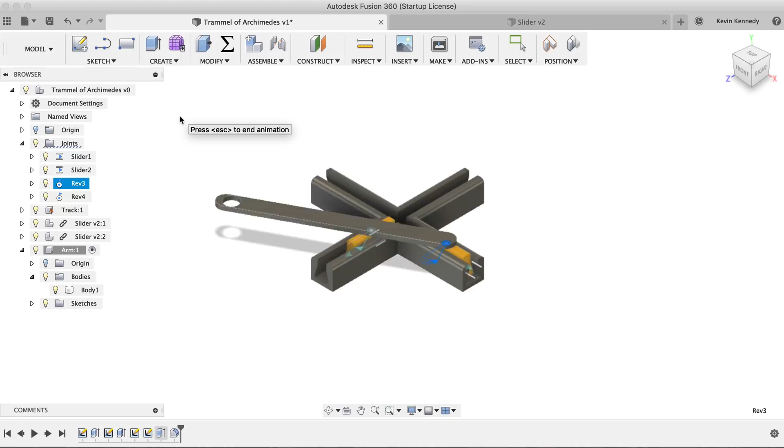By the end of this video, you'll know how to create a Trammel of Archimedes in Fusion 360.

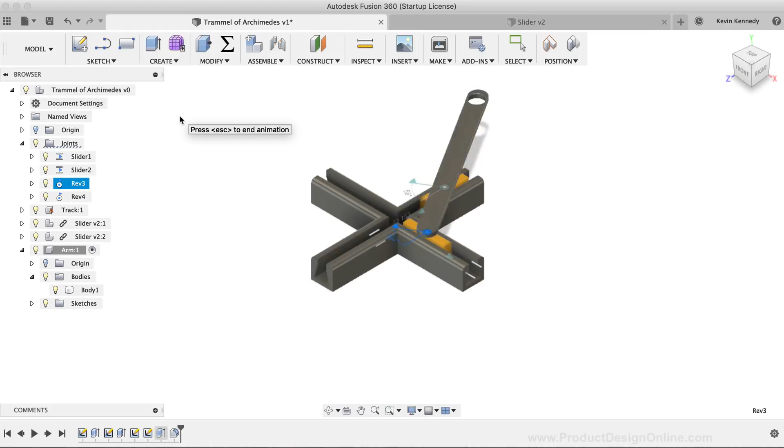The Trammel of Archimedes is a mechanism that generates the shape of an ellipse. Some have even coined the machines to be do-nothing machines, as they're pretty pointless when they have a knob on the end. Usually they have a pencil or knife attached to the end, so one can draw or cut an ellipse into a surface underneath.

These are great little projects for woodworking or 3D printing, and the kids seem to love them, so I thought this would be a fun object to model in Fusion 360.

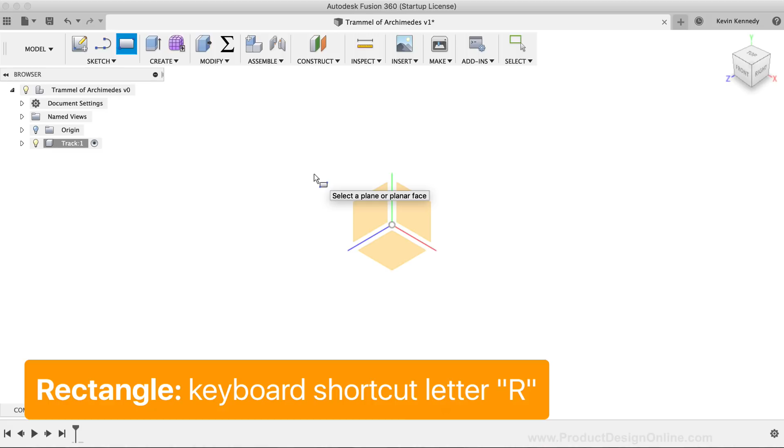With the base component now active, I'm going to activate the rectangle command using the keyboard shortcut letter R as in Romeo. Then you'll be prompted to select the plane to sketch on. I'm going to select the XZ origin plane.

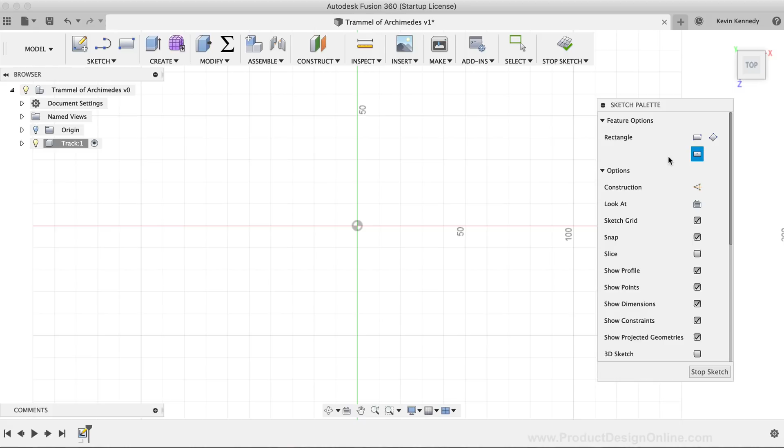Before sketching anything out, I'm going to select the center rectangle option in the sketch palette. I'm simply selecting this option so I can center the rectangle with the center origin point. I'll click on the center origin point and drag out with my mouse.

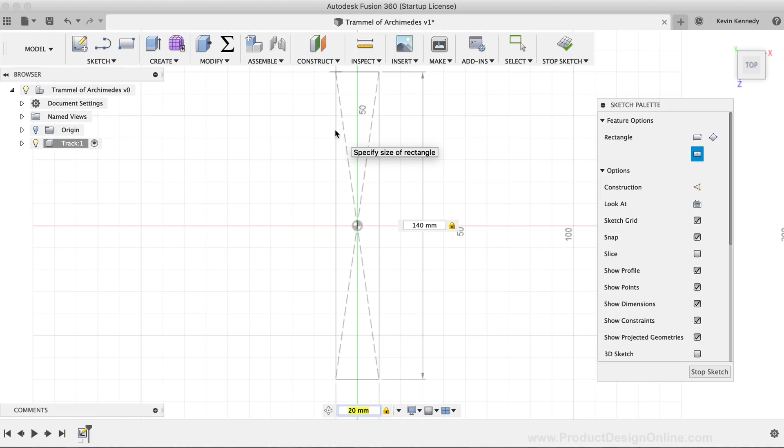I'll type out 20 millimeters for the width, followed by the tab key to lock the dimension in place. Next, I'll type out 140 millimeters for the height, also followed by the tab key to lock the dimension in place. Then I'll simply click to set the rectangle in place.

At this point, we need a rectangle of the same size running in the horizontal orientation. Instead of creating another rectangle from scratch, I'm going to use the circular pattern tool, as this will limit the number of dimensions I use in this sketch.

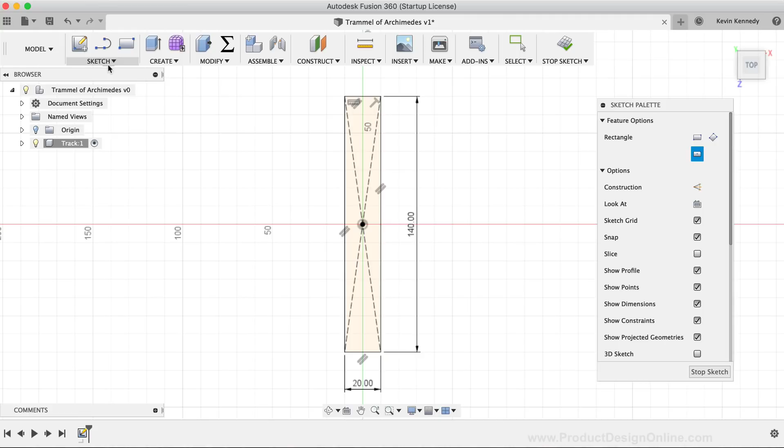I'll select the sketch drop-down list, then select the circular pattern option near the bottom of the list. I'm going to click and drag with my mouse cursor to select the entire rectangle, including the reference geometry in the middle. However, before we can select a center point for the circular pattern tool, we'll need to deselect the center point of this rectangle, as it can't be used for both the object selection and the center point selection.

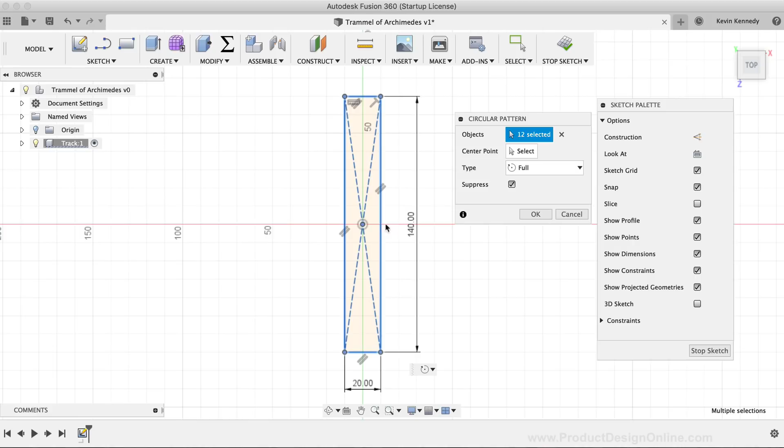I'll simply click on the center point of the rectangle, then I'll have to select the center point selector in the dialog box. I can now reselect the center point of the rectangle.

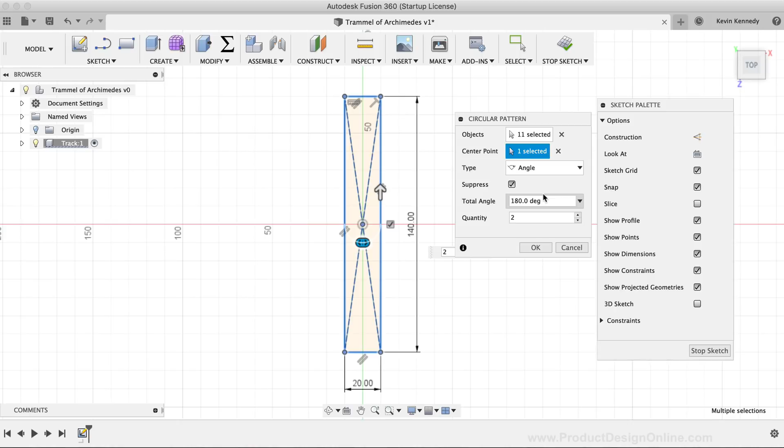You'll now see we have a quantity option in the dialog box. I'll change the quantity to 2 instances. Next, I'm going to set the type option to angle so I can set the angle to 180 degrees. Finally, I'll click the OK button to confirm the results.

We'll now want to extrude this sketch to turn it into a 3-dimensional object, which we'll then use to create the track of the machine.

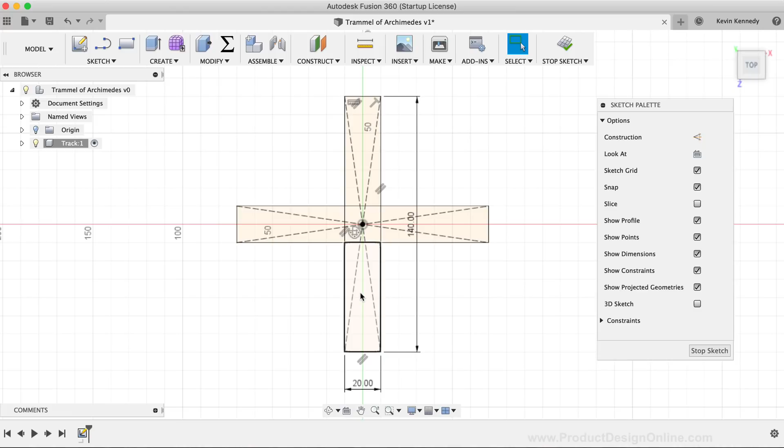This sketch has 5 different closed profiles, as you'll see as I hover my mouse over each area of the sketch. Instead of selecting each profile one by one, I'm going to select the entire sketch again. Then I'll hit the keyboard shortcut letter E as in echo to activate the extrude command. For the height, I'll type out 19 millimeters.

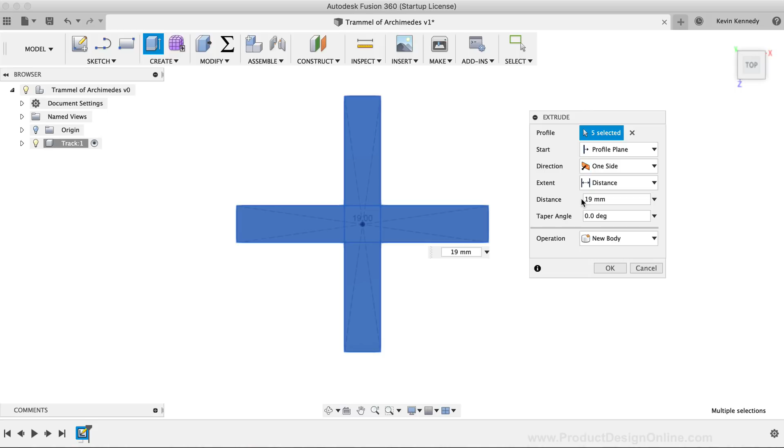At this point, we need to cut the slots out of the track. I'm going to hit the keyboard shortcut letter L as in Lima to activate the line command. Then I'm going to select the face at the end of one of the rectangles, as we'll draw a profile shape and then extrude cut it away from this component.

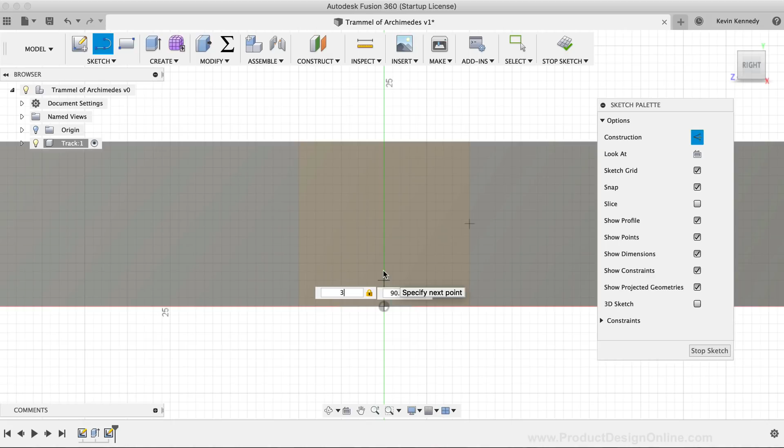I'm going to turn on the construction option by selecting it in the sketch palette, as we'll first need to create a reference line. I'm going to click on the bottom origin point, then create a line going upwards. I'll type out 3 millimeters, then click to set the line in place.

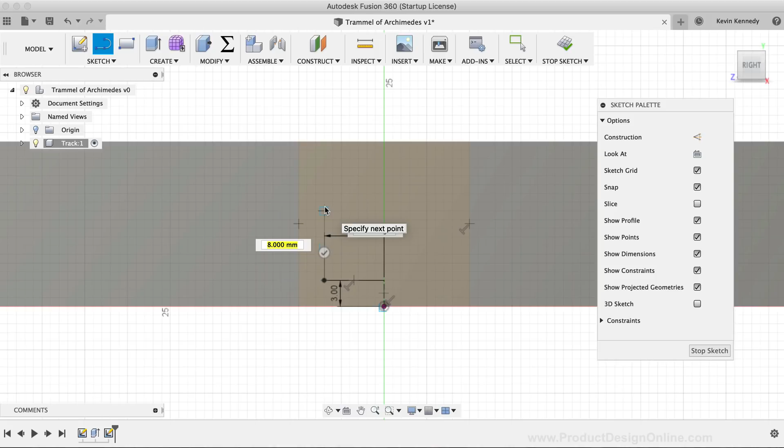Before I draw the rest of the lines, I'll select the construction function in the sketch palette to turn it off. I'll make a horizontal line going to the left with a length of 7 millimeters. I'll click to place the line, then draw a line towards the top, typing out 12 millimeters for the length. I'll hit the tab key to lock the dimension in place, then set the angle input field to 75 degrees before clicking to place the line.

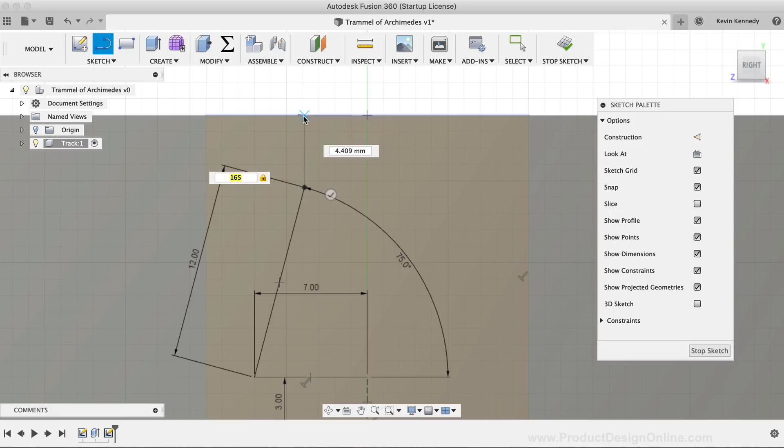For the next line, I'll create a line that goes all the way to the top edge, making sure this line is vertical, or at 165 degrees. I'll click to place the line, then draw a line to the right where it snaps in at the y-axis. Now that we have half of the profile sketched out, we can mirror the sketch to the other side to create the other half.

I'll select the sketch drop-down list, and then select the mirror command. It's important to note that the sketch mirror command only works with sketch geometry, and you need to select that one, not the modeling mirror command located under the create drop-down list.

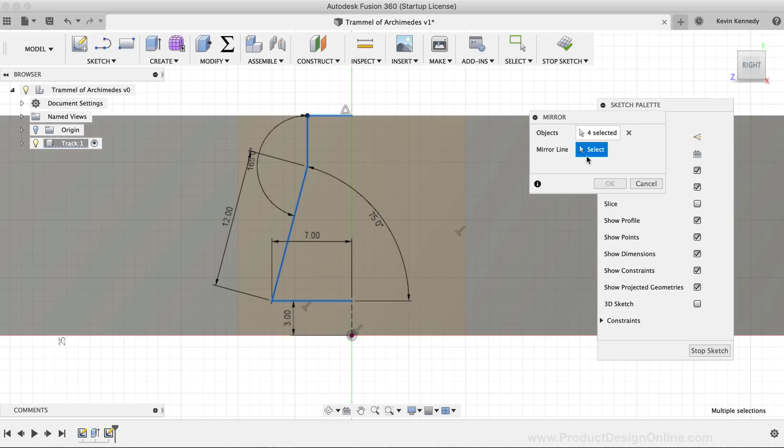Once the mirror command is active, I'll select the 4 lines that make up the sketch so far. Then I'll select the mirror line selector in the dialog box. For the mirror line, I'll select the dashed reference line at the bottom. Then I'll click the OK button to confirm the mirror results.

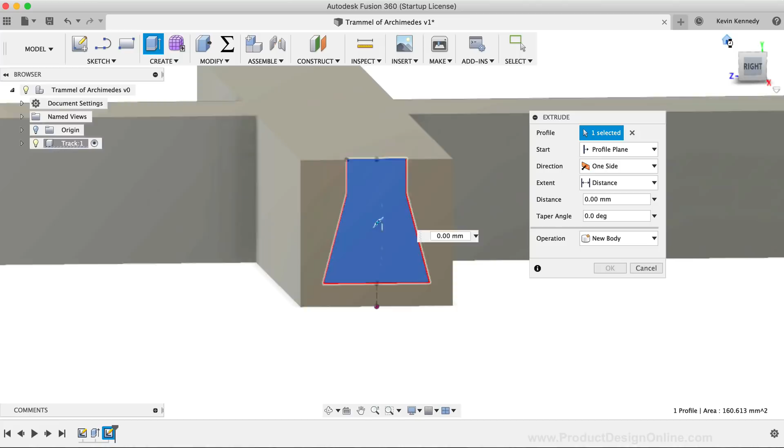At this point, we'll use the profile to extrude the track. I'll select the extrude command in the toolbar, then select the profile. I'll change the operation type to cut, as we want to cut the shape away from the existing body. Then I'll change the extent type to all to ensure the cut goes all the way through the body. Finally, I'll click the OK button to confirm the results.

Now that we have one of the tracks cut out, we can pattern the second track cut out. This time, I'll select the Create drop-down menu, find the Pattern flyout folder, and select the Circular Pattern feature.

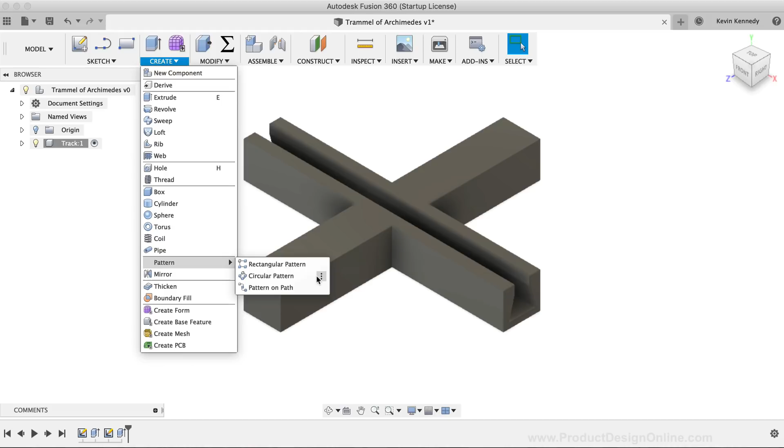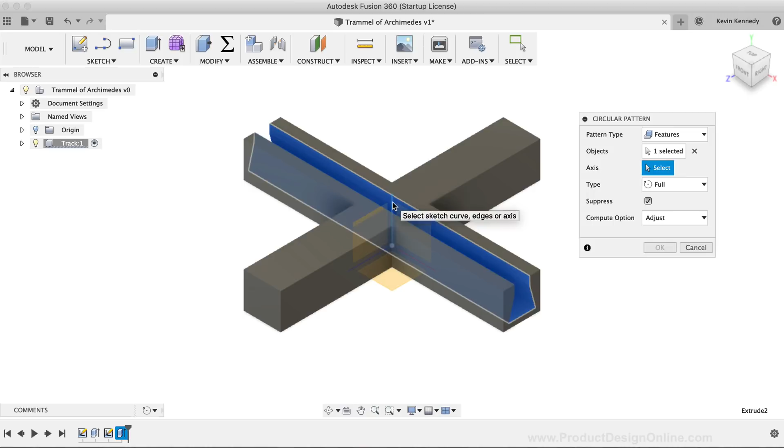First, we need to change the pattern type to the Features option. This will allow us to select the Extrude feature in the Fusion 360 timeline. Next, we'll need to select the axis. I'll select the axis selector, and then select the y-axis. I'll then change the type selection from the full option to the angle option. I'll type out 90 degrees, then change the quantity selection to 2 instances before selecting the OK button.

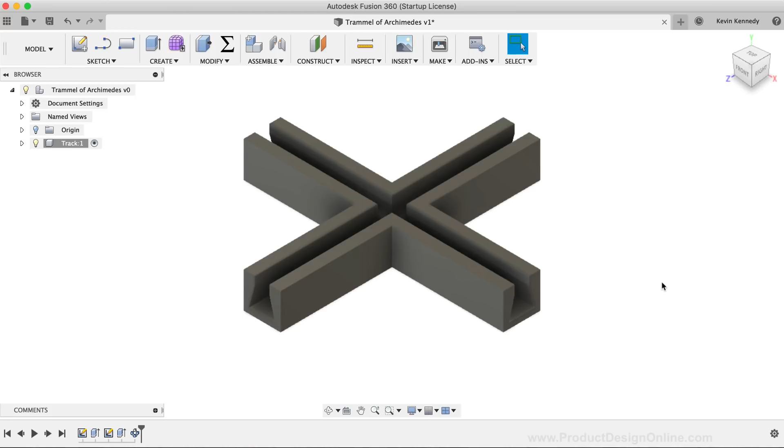Let's now add some fillets to finish off the track. I'm going to hold down the Shift key on my keyboard, and select all 8 of the outside lines. Then I'll hit the keyboard shortcut letter F as in Foxtrot to activate the Model Fillet command. I'll type out 3 millimeters for the fillet radius, and then click the OK button to confirm the results.

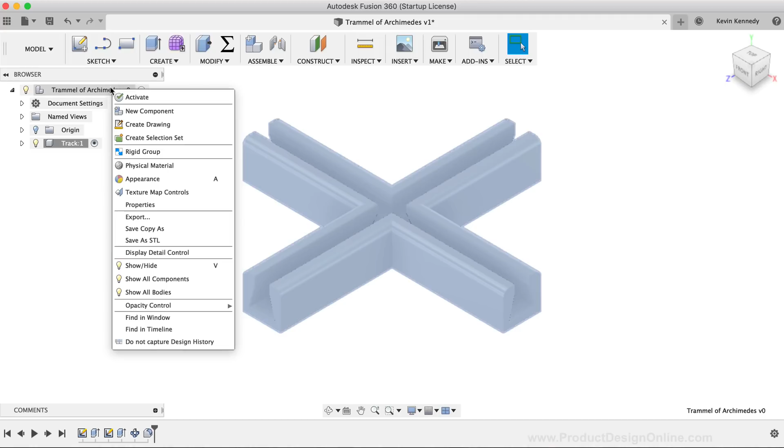We'll now need to create a new component where we'll create the bodies that slide in the track. I'll right-click on the top-level component in the Fusion 360 browser, then select the New Component option. To rename this component, I'll click once to select it, then click again to open up the input field. I'll type out slider for the name, followed by hitting the Enter key on my keyboard.

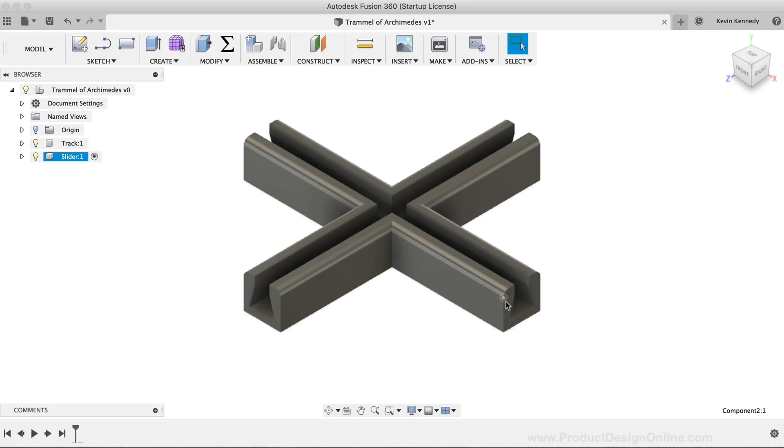With the slider component active, we'll begin by offsetting a sketch on the edge of the track. I'll select the end face of one of the tracks, then hit the keyboard shortcut letter O as in Oscar to activate the offset command. Then we'll have to select the face once again, which selects the outer sketch geometry of this face. I'll type out 0.5 millimeters for the offset dimension, which will act as our 3D printer's tolerance.

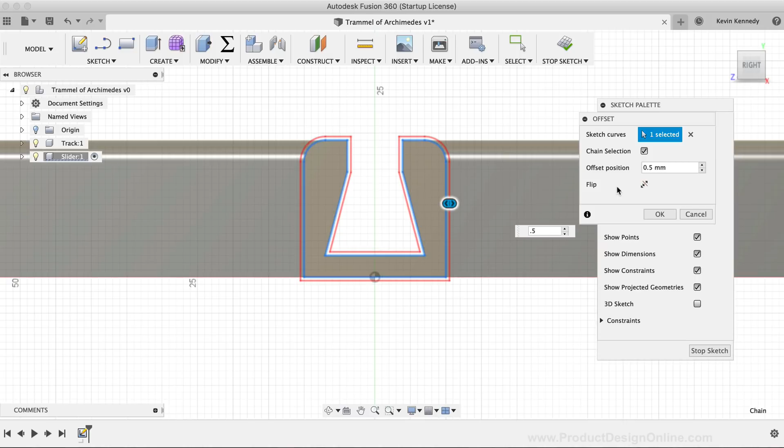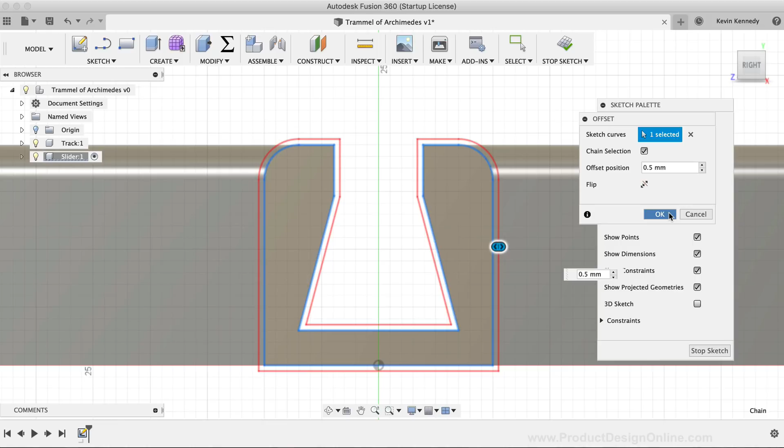If you're aware of a different tolerance that works well with your 3D printer, you can type that out here. We'll also want to make sure the offset sketch geometry is on the inside of the cutout. If it is not, you can hit the flip button in the dialog box. Then I'll click the OK button in the dialog box to create the geometry.

We'll now want to close off our profile shape at the top. I'm going to hit the keyboard shortcut letter T as in Tango to activate the trim tool. Then I'll click on the left horizontal line and the right horizontal line to trim them away. This will let me drag each vertical line upwards about 1 or 2 millimeters, ensuring that this component will stick out of the track section. Then I'll activate the line tool by selecting it in the toolbar.

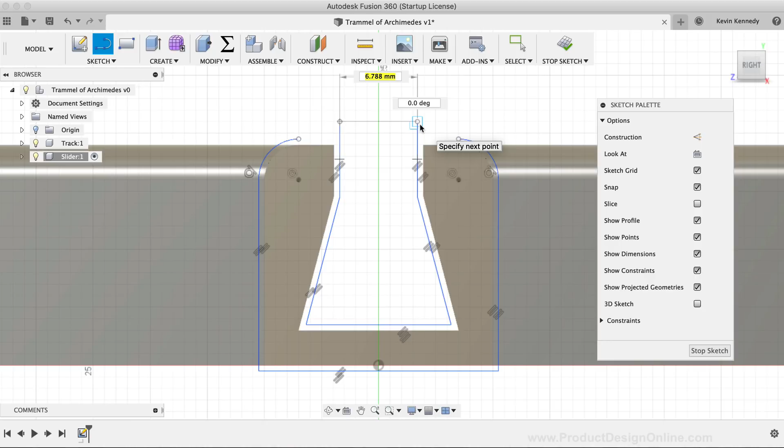Next, I'll simply click on the left side and then the right side to connect them. At this point, you should have an orange background highlight filling the shape, which signifies that this is a closed profile.

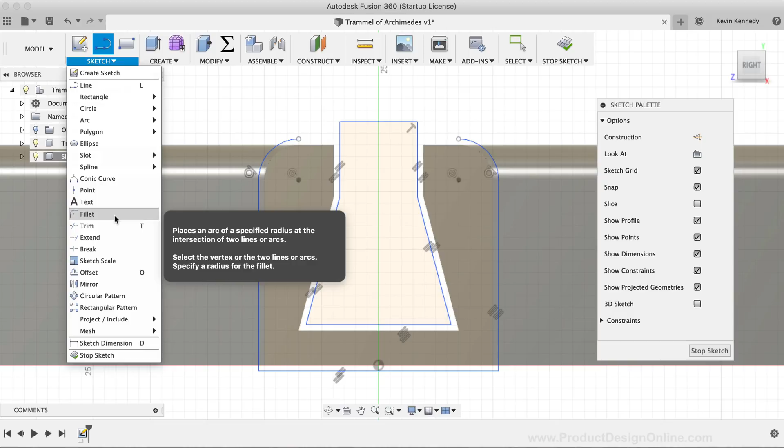Before we extrude the shape, we can also add some sketch fillets to its edges. I'll select the sketch drop-down list, then select the sketch fillet command, which is not to be confused with the modeling command we used earlier.

I'm going to click on the bottom 2 points of the profile shape, then the 2 points in the middle of the shape, and finally the top 2 corners of the shape. Then I'll type out 1 millimeter for the fillet radius, and hit Enter on my keyboard to confirm the sketch fillets.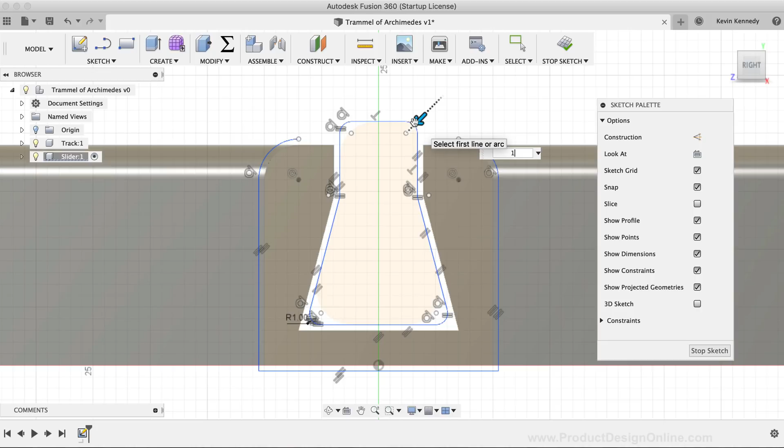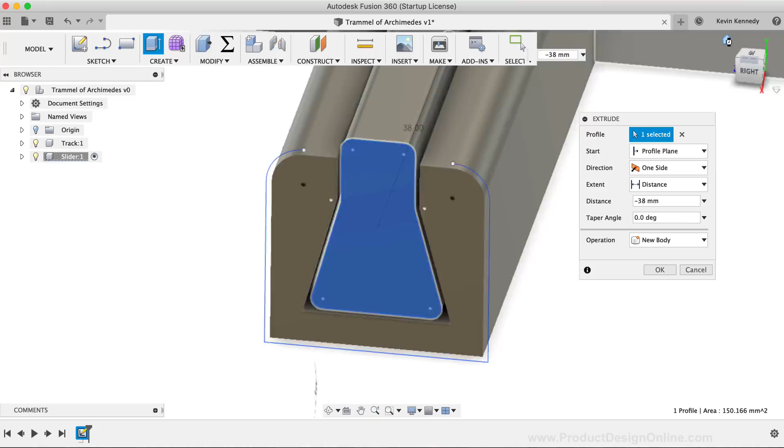Next, I'll hit the Extrude command in the toolbar, then select the closed profile we just created. I'll type out 38 millimeters for the length. If yours is going in the wrong direction, you can simply add a minus sign in front of the dimension value. Finally, I'll click OK to create the slider body.

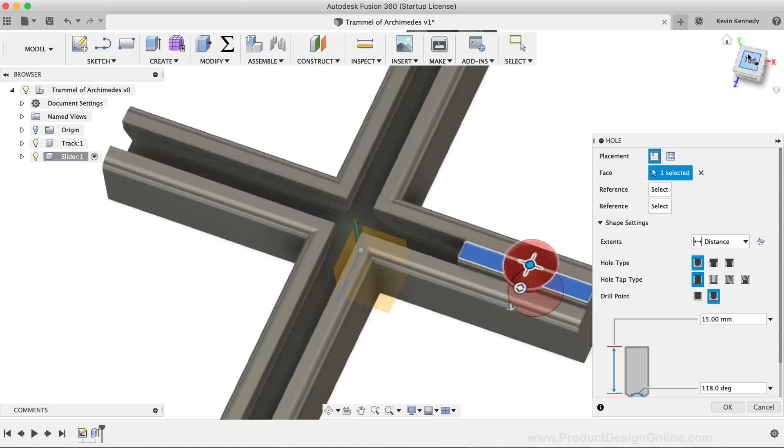Lastly, we'll want to create a hole on the top of the slider component. I'll select the hole command under the Create drop-down list, then select the top face of the slider. You can also click on the top of the view cube to make the model easier to work with.

I'll drag the hole until it snaps into the center point. Then we'll change the hole settings so the width is 3 millimeters and the length is 6 millimeters, and click the OK button.

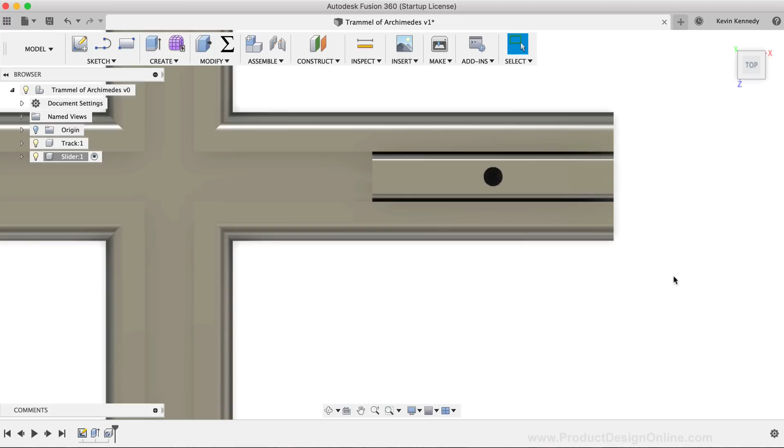To make this slider even easier to see or distinguish from the track, I'm going to quickly apply the appearance of yellow. I'll hit the keyboard shortcut A, as in alpha, to activate the appearance command, search for yellow, and drag and drop one of the yellow appearance options onto the slider component.

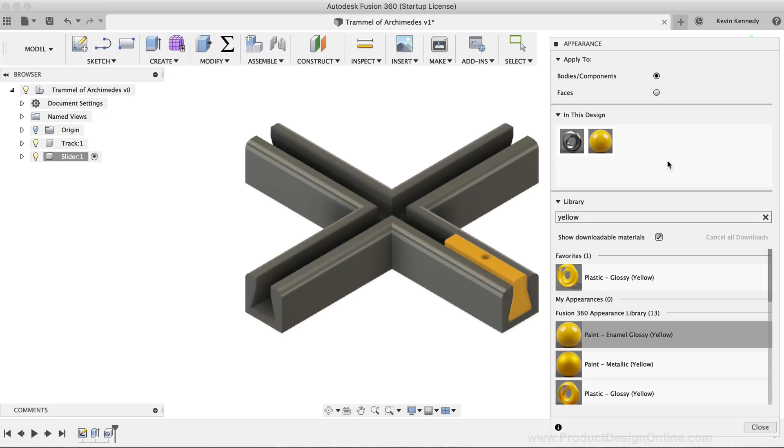At this point, we'll want to copy the slider component to make a second instance of it. I'm going to pull this slider component into another Fusion 360 file, and then we'll insert the file back into the main design file. This will ensure we have linked copies of the component, and we only have to update the master copy if we need to make any changes.

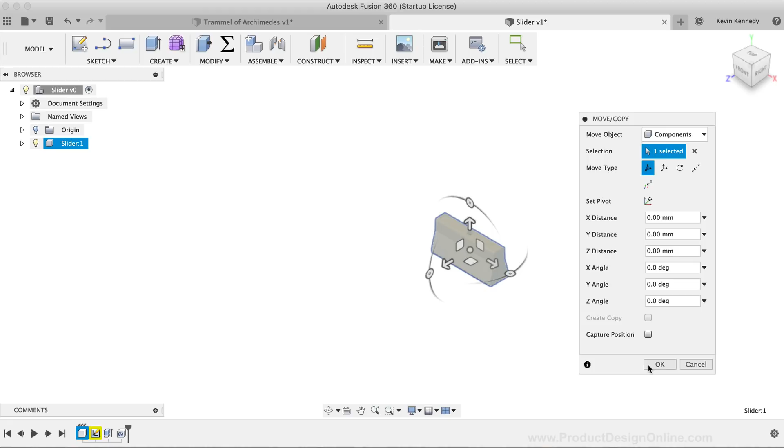First, I'll right-click on the slider component and select the Copy option from the list. I'll click the New Tab button above the toolbar and quickly save this new file as slider. Then I'll right-click and select Paste New, click OK to confirm the paste command, and hit Save again to ensure this component is saved.

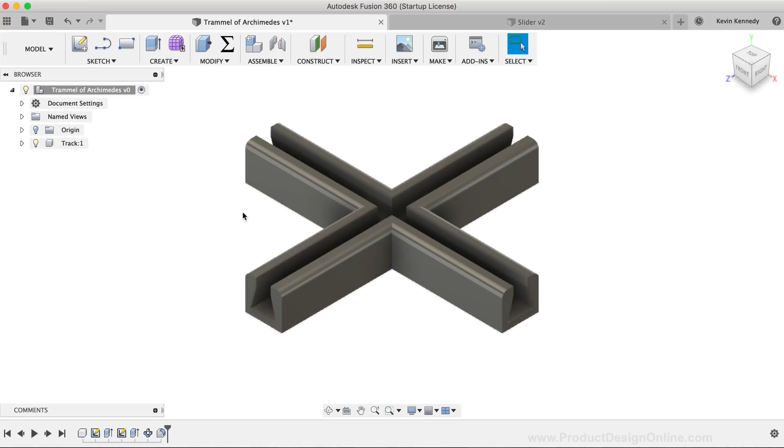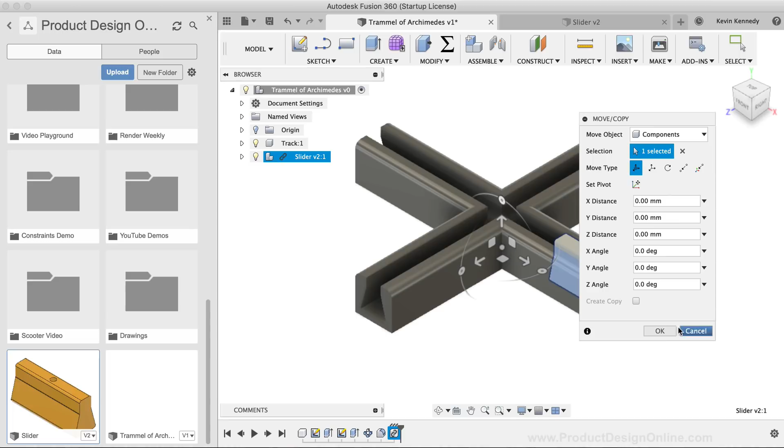Back in the main design file, I'll right-click on the slider component and select Delete, confirming that I want to delete it. Then I'll open my data panel by selecting the data panel icon in the upper left-hand corner, find the slider file, right-click to select Insert into Current Design, which inserts a linked component into our main design file, and click OK to confirm the placement.

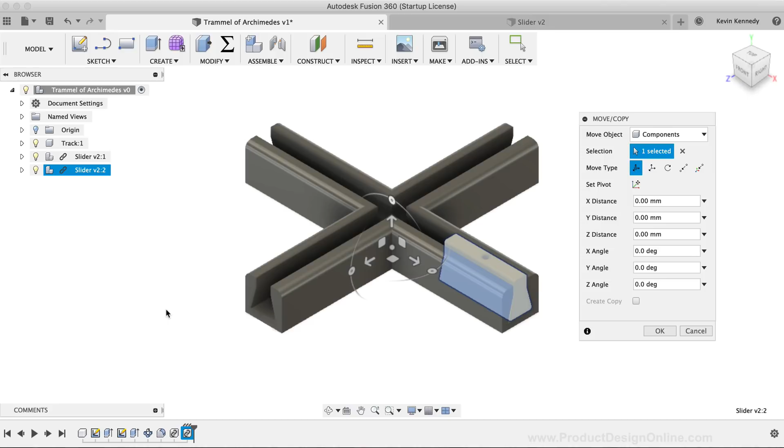To now create a second instance of this slider, we can copy and paste this linked component. I'll right-click the linked slider component and select Copy, then right-click in the canvas window to select Paste. I'll type out -51 millimeters for the X distance, as we want this other piece to be in the middle of the track.

We also want it to be sliding on the other track, so I'll select the rotate option in the Move/Copy dialog box, select the green Y-axis for the axis selector, type out 90 degrees for the rotation, and click OK.

We'll now want to create the arm component that controls the sliders. I'll right-click on the top level component, select New Component, and rename this one Arm.

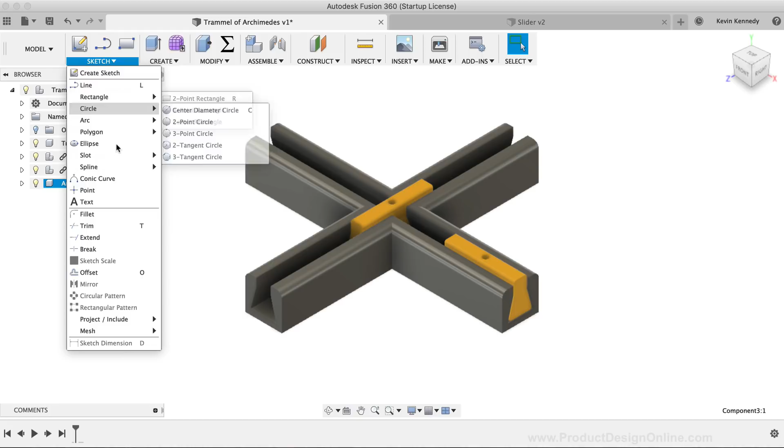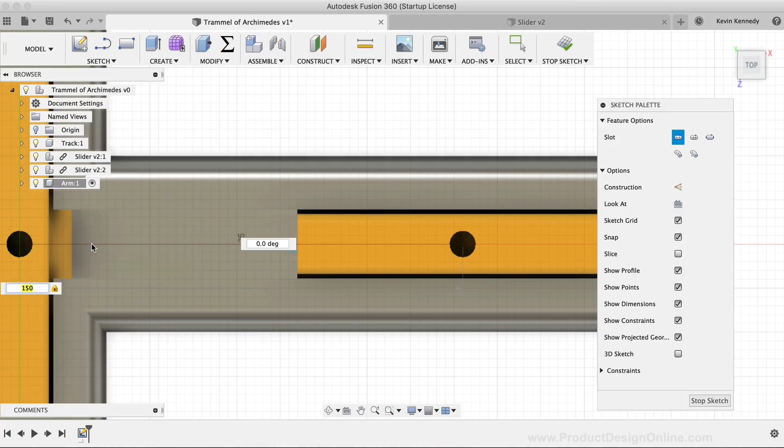With the Arm component active, I'll select one of the slot commands from the Sketch drop-down list. Under the Slot flyout folder, I'll select the Center to Center Slot option. Then I'll click at the center point of the circle on the outer slider, drag my mouse cursor to the left, and type out 150 millimeters for the distance. I'll click to set the slot distance, and make the width of the arm 14 millimeters.

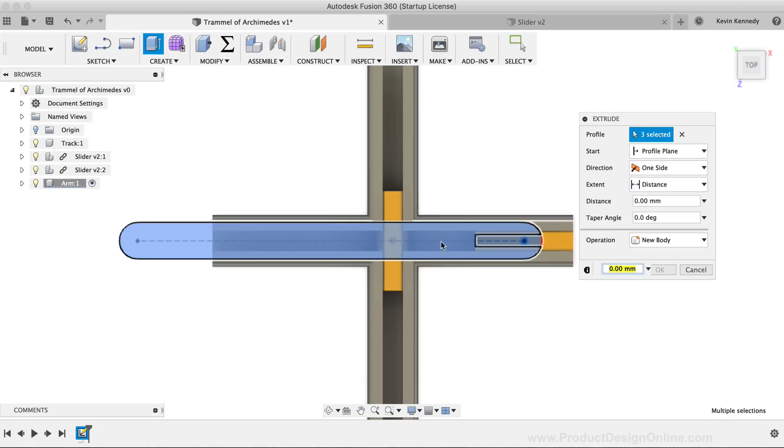We can now hit the extrude command in the toolbar, and select the closed profiles that make up the sketch geometry of the arm. Then I'll make the extrude dimension 4 millimeters for the thickness of the arm.

To finish off the arm component, we'll need to cut out a hole for a finger or pencil that will be used to revolve the arm around, and then we'll also need to create pins that will go into the slider components.

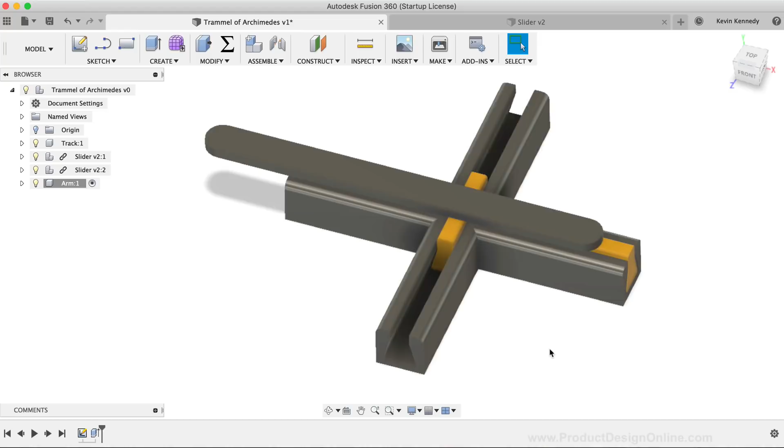I'll hit the keyboard shortcut letter C as in Charlie to activate the center circle command. Then I'll select the top face of the arm component, click on the left side, and simply make a circle of 12 millimeters.

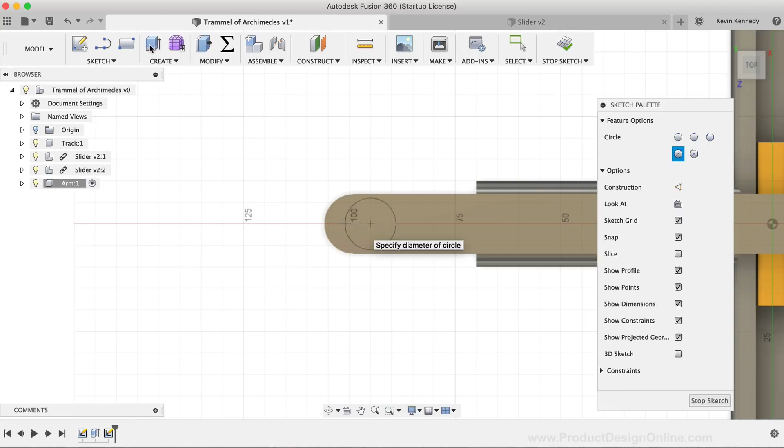I'll hit the extrude command in the toolbar, select the circle profile, and then change the operation to cut. Then I'll change the extent type to All to ensure it cuts all the way through the arm component.

Next, we'll create the two prongs that fit into each hole of the sliders, and then we'll finish off this model by applying joints to it.

For now, we'll need to hide the main body of the arm component. I'll toggle open the arm component folder in the Fusion 360 browser, then toggle open the bodies folder and select its corresponding light bulb.

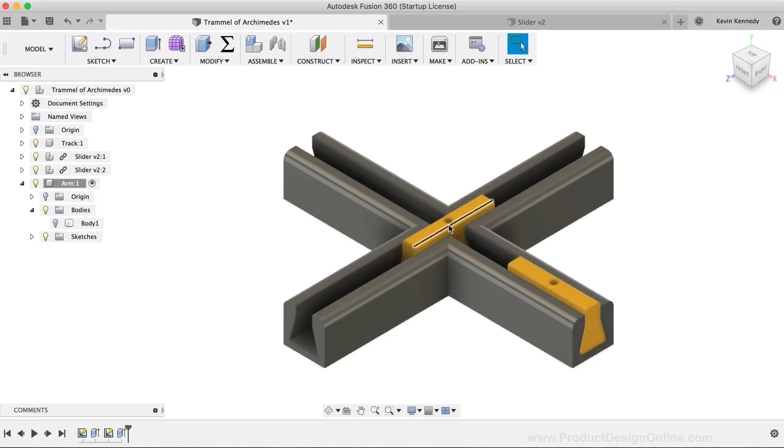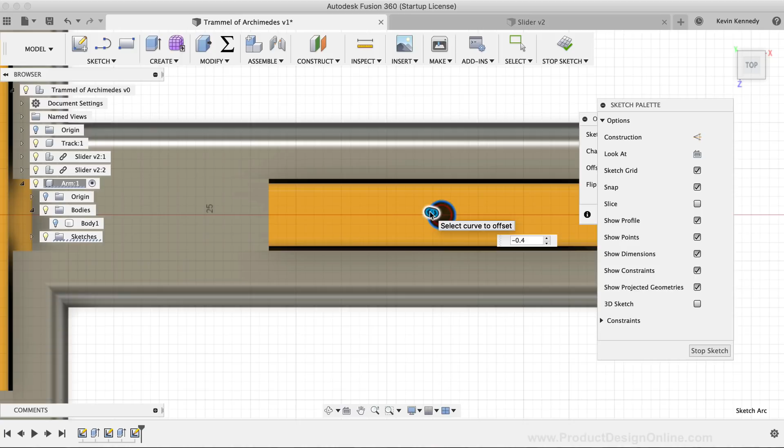We'll now need to use the offset command to create the tolerance so the prongs will actually fit in each hole. I'll hit the keyboard shortcut letter O as in Oscar to activate the offset tool, then hit the top face of the slider component and select the edge of one of the holes. I'll type out -0.4 millimeters for the offset distance, leaving a small tolerance for a 3D printed part. Then I'll repeat these steps for the other hole.

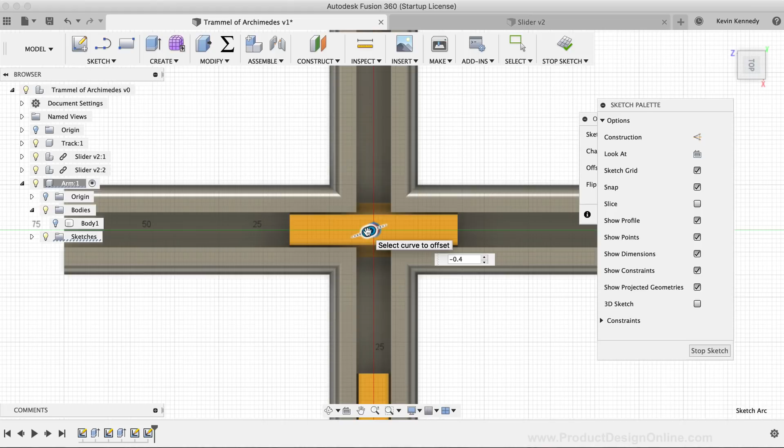I'll stop the sketch and then hit the keyboard shortcut letter O once again. Then I'll hit the top face of the other slider component and select the edge of the hole, once again typing out -0.4 millimeters for the offset distance.

After each offset is created, I'll hit the keyboard shortcut letter E as in Echo for the extrude command. I'll select both circles to extrude, and type out a distance of 6 millimeters for the length of each cutout. I'll make sure these cylinders are running into the hole, and set the operation to Join before clicking OK.

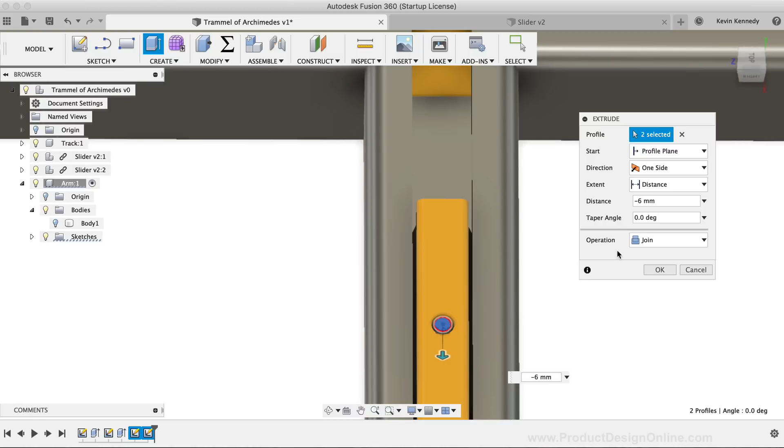Now, the Join operation will ensure that these two prongs join the main body of the arm, resulting in only one body in the Fusion 360 browser.

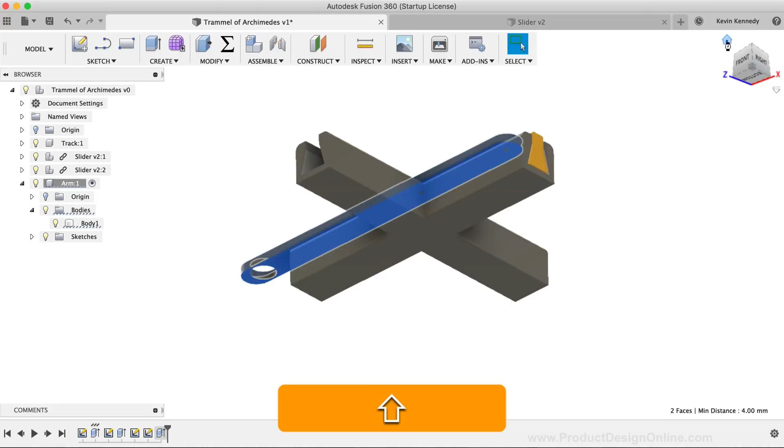Lastly, I'll hold down the Shift key as I select both the top and bottom faces of the arm. Then I'll hit the keyboard shortcut letter F as in Foxtrot to activate the fillet command, add a fillet radius of 0.5 millimeters, and click OK.

At this point, we can finish off the model by adding some joints so we can see the model actually function before printing it out.

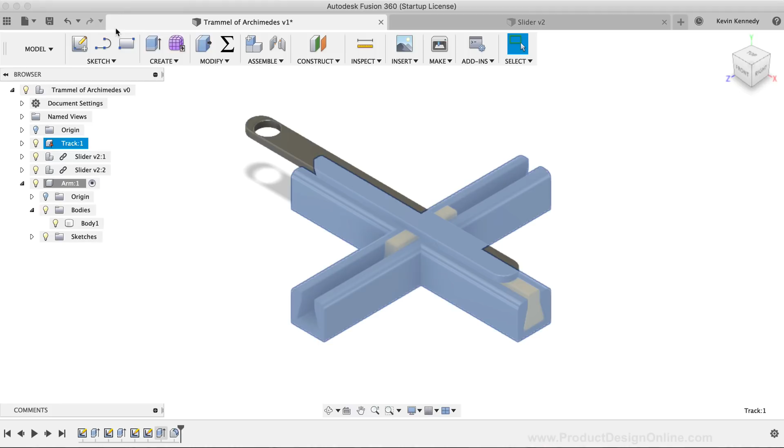We'll need to use As-Built joints because we built our component pieces in place. First, I'll right-click on the track component in the Fusion 360 browser and select Ground. The Ground option is literally going to ground the component, ensuring it can't be moved anywhere. I'm doing this to the track as I'm going to add joints to the rest of the components.

I'll select the Assemble drop-down list and then select the As-Built Joint option. For the first joint, I'm going to select the outer slider, then select the Joint Type drop-down.

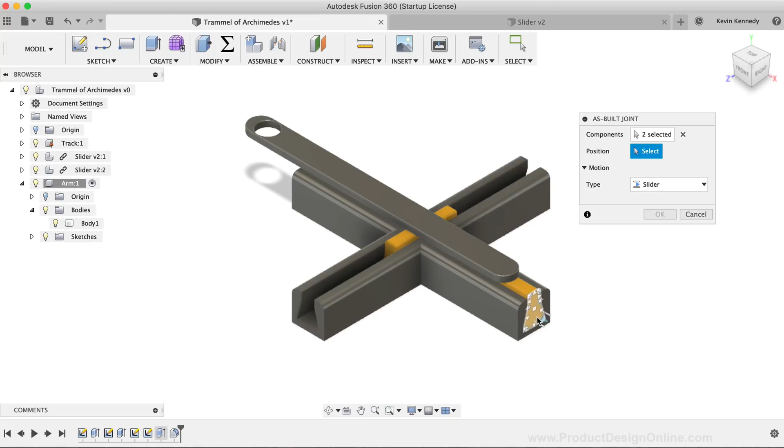I'll select the Slider option from the list of available options, as we want this component to slide back and forth in its track. We also need to select the track component so the joint knows where the component should slide. We'll then define the position, and because this component is already in the position we want, I'll simply click on the center of the end face of the component.

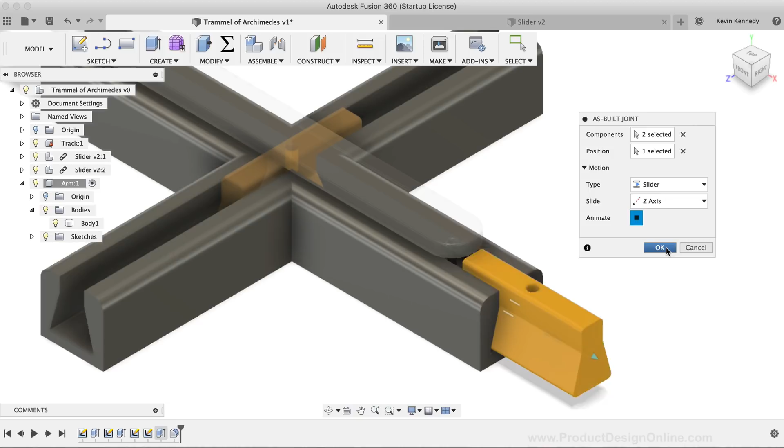Lastly, we can hit the play button to ensure the joint looks correct. Everything looks good, so I'll click the OK button to confirm the results.

We'll need to apply this joint to the other slider component as well. I'll right-click and select Repeat As-Built Joint. You'll notice the slider type is already selected, as it defaults to the last joint type you chose. Therefore, we'll need to select the slider in the middle this time, and then once again select the track.

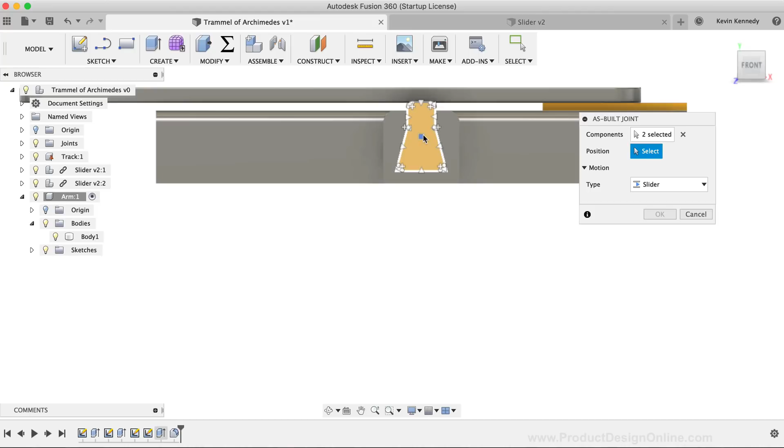Then I'll select the center of the component for the position. Everything looks correct with the animation, so I'll click the OK button.

Next, we need to create revolute joints to attach the pin of the arm to each slider, allowing them to revolve in a circular motion.

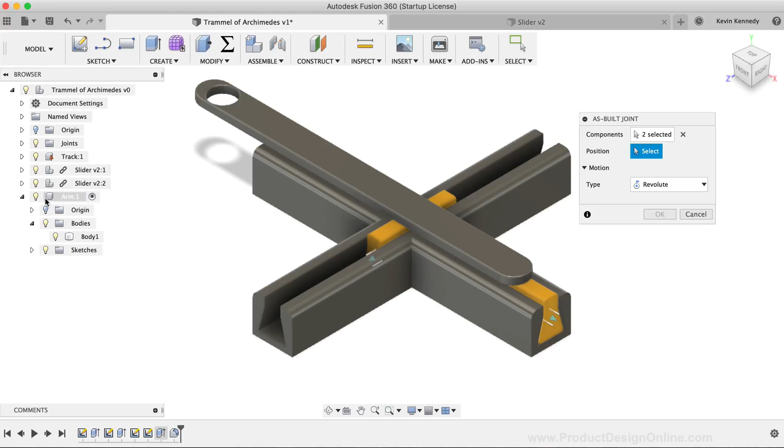I'll right-click to select the Repeat As-Built Joint option, then select Revolute as the joint type. I'll select the arm component and then the slider component. Then I'll have to hit the light bulb in the Fusion 360 browser for the arm component, as we'll need to turn this off so we can select the position of the revolute.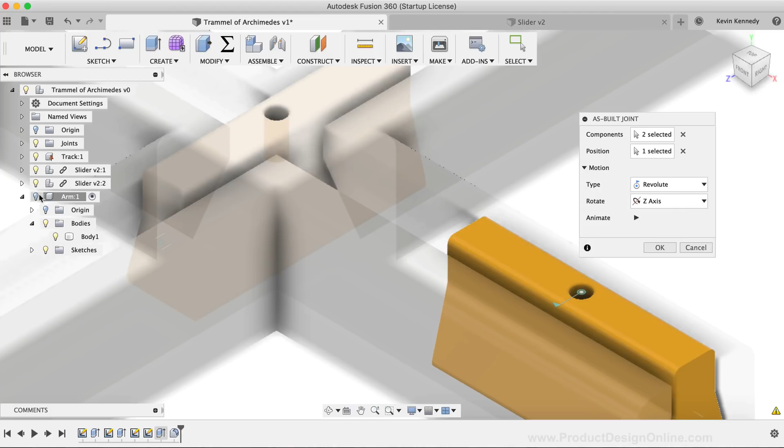For the position, I'll zoom in on the hole cutout, and we'll need to select the center point of the cutout. You'll get a warning at this point telling you the object is not visible, so let's go ahead and turn it back on by selecting the light bulb again.

Then we can hit the play button to check the animation. It looks correct, so I'll click the OK button, and we'll have to do the exact same steps for the other pin.

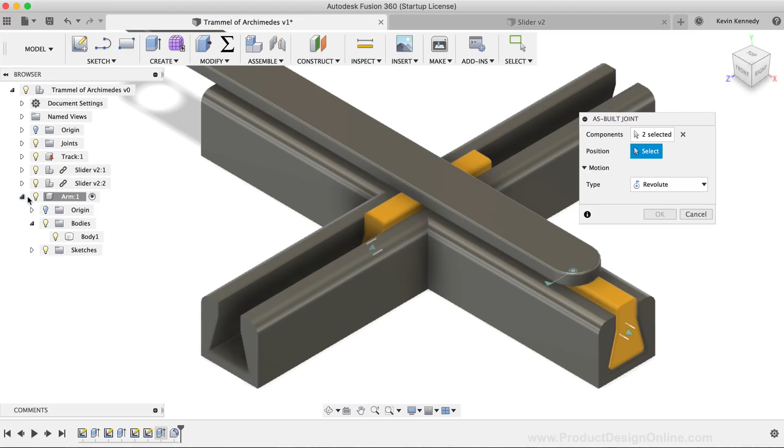I'll right-click to select the Repeat As-Built Joint option. I'll select the arm component and then the slider component. Then I'll hit the light bulb in the Fusion 360 browser to hide the arm component once again.

And finally, I'll select directly in the center point of the cutout. Lastly, I'll click the OK button to create the joint.

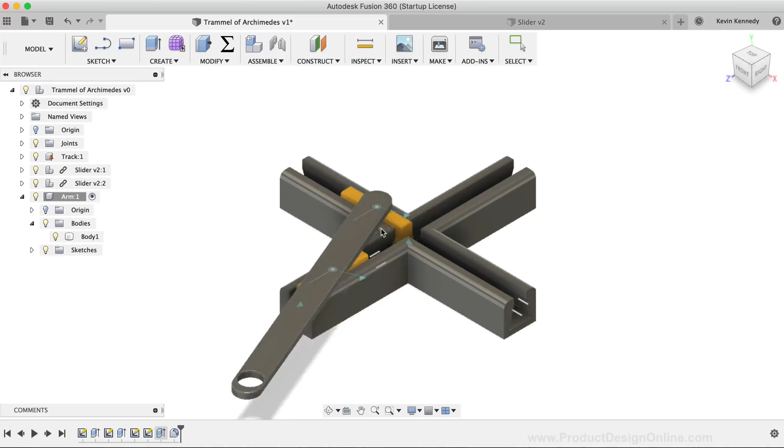At this point, we have the joints to let this Trammel of Archimedes function properly. You can now drag a component around to see it move. However, you may find that dragging the components around isn't as smooth as you'd like, and it's hard to make the motion continuous.

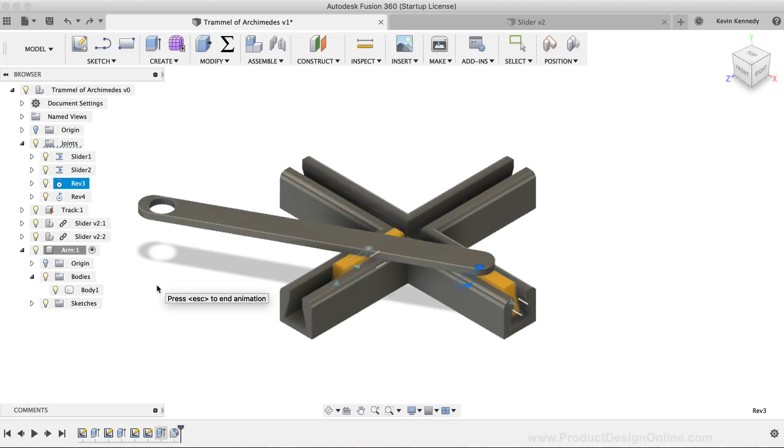If I toggle open the Joints folder in the Fusion 360 browser, you can right-click on one of the Revolute joints and select the Animate Model option. This will make the Revolute joints animated, making the model function as expected.

Now it's important to note that if you select Animate Model for the slider joints, then the entire animation will not work. To stop the animation, simply hit the Escape key on your keyboard.

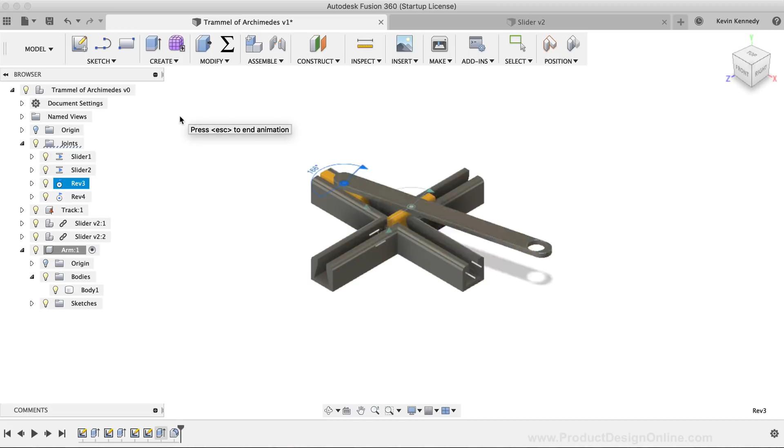If you are going to print this out, then of course you can also tweak the design to better suit your needs. You may even want to add a knob on the end of the arm, making it easier to turn. I designed this one to be simple, with the idea that the pins would simply fit into the slider holes. However, you could even create countersunk holes in the arm and add screws running through the arm and into the slider components. You could also make some attachments to attach a pen or pencil if you're looking to draw some perfect ellipses.